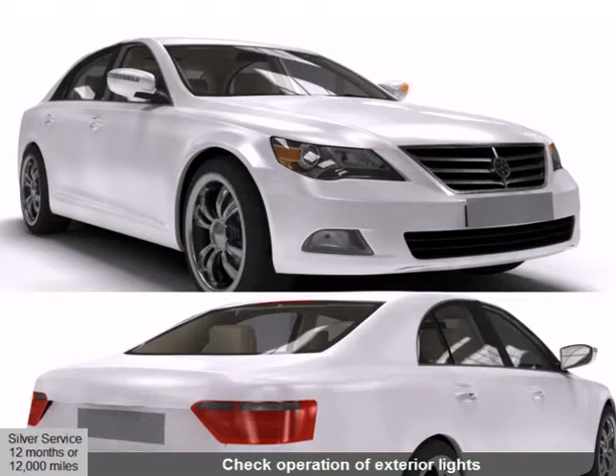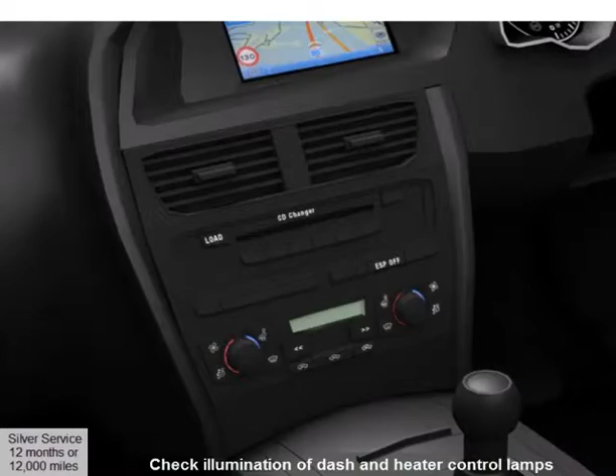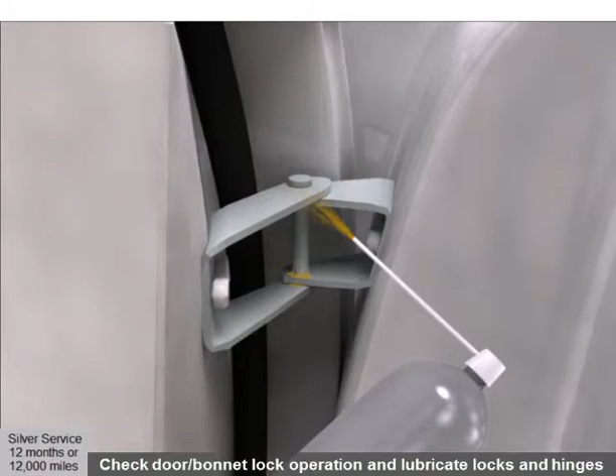Exterior lights, reflectors, warning lamps, dash and heater control lights are all checked for correct operation. The battery condition and connections are checked to ensure consistent starting. The door and bonnet latches are checked, and locks and hinges are lubricated. Windscreen wipers are checked to make sure the screen is kept streak-free and the screen wash is refilled.

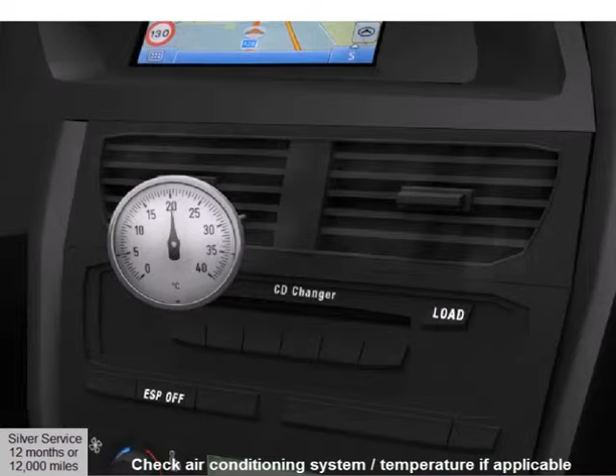Where the vehicle is fitted with a pollen filter, the filter is inspected to ensure clear airflow, and the aircon is checked for cooling efficiency.

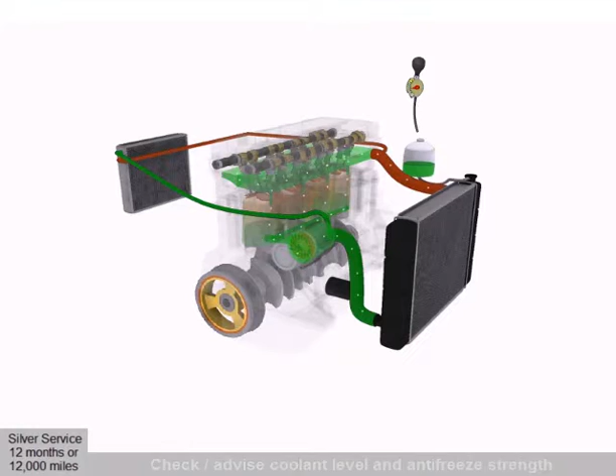The engine oil is drained and refilled with new oil according to manufacturer specifications. The oil filter is replaced, and the engine is visually inspected for oil leaks. The engine air filter is replaced. The engine coolant level is checked, and the condition and strength of the antifreeze is measured. The coolant is topped off if required, and the cooling system is visually inspected for leaks.

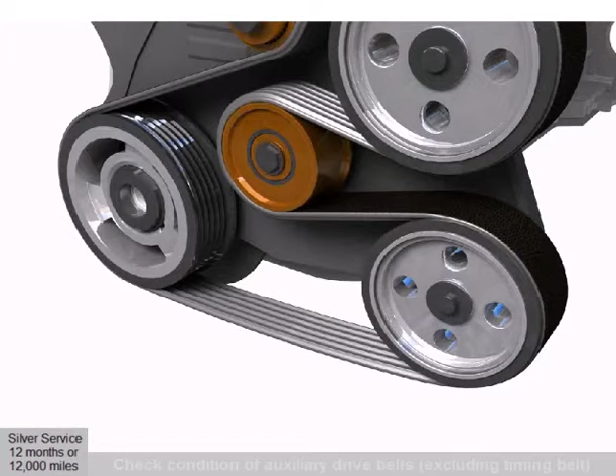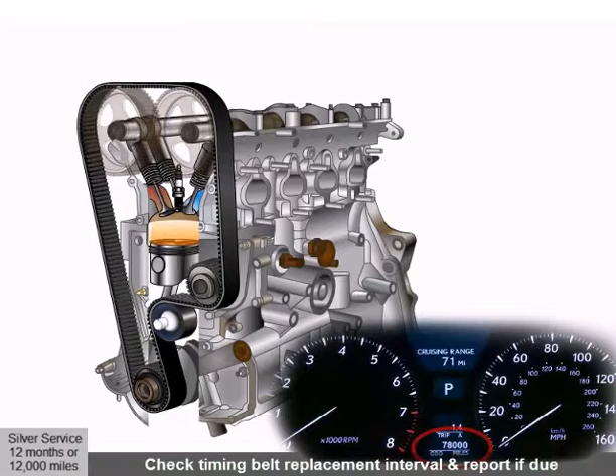The condition and tension of accessory drive belts, such as the alternator belt, is checked, and the fuel system, including the tank and fuel cap, are inspected. On engines with a timing belt, the manufacturer's replacement interval is checked, and replacement is recommended if required.

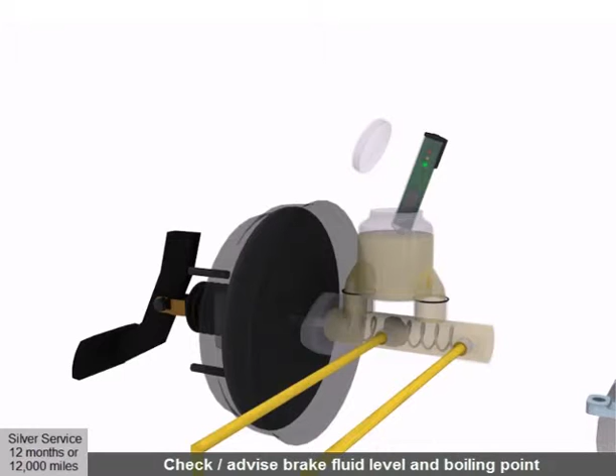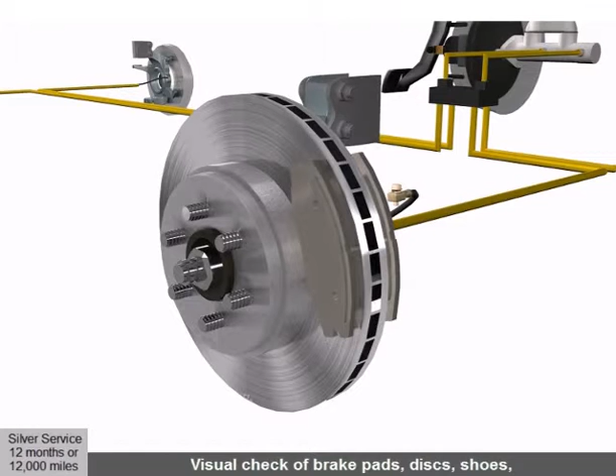Next, we move on to the brake system. The operation of the brake servo is checked, along with the condition and boiling point of the brake fluid. The fluid level is topped off if required. Brake calipers, pads, discs, wheel cylinders, shoes and drums are inspected for wear or damage, and brake hoses and lines are checked for corrosion or wear.

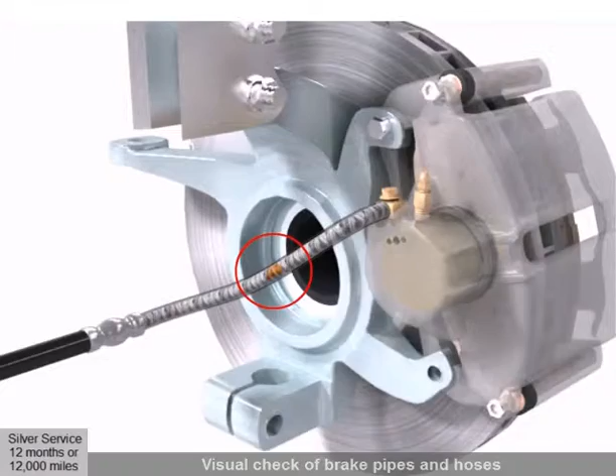The operation of the handbrake and linkages are checked and adjusted where necessary.

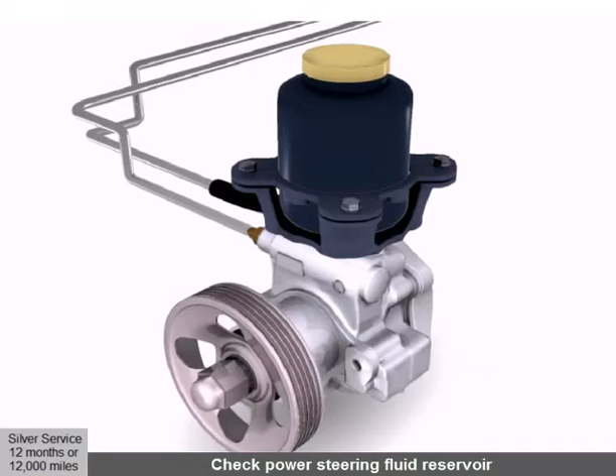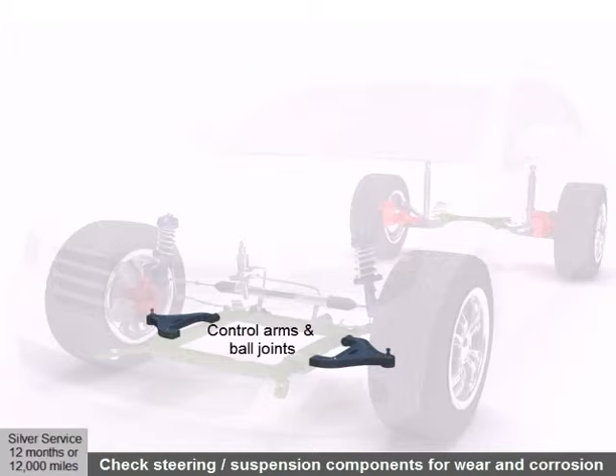Areas checked in the steering and suspension system include the road springs, the condition and level of the power steering fluid, and all major steering and suspension components, including suspension struts and shock absorbers, control arms and ball joints, the steering rack, track rods and linkages, anti-roll bars and anti-roll bar links.

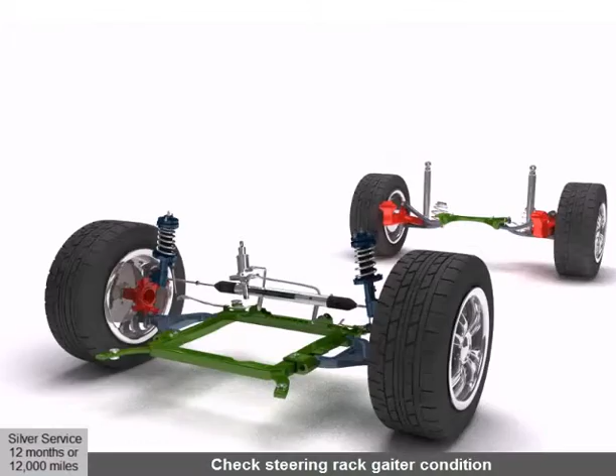The gaiters on the steering rack are inspected for tears or cracking, and the shock absorbers are inspected for leaks or damaged mountings. Wheel bearings are inspected for looseness or excessive free play and road noise.

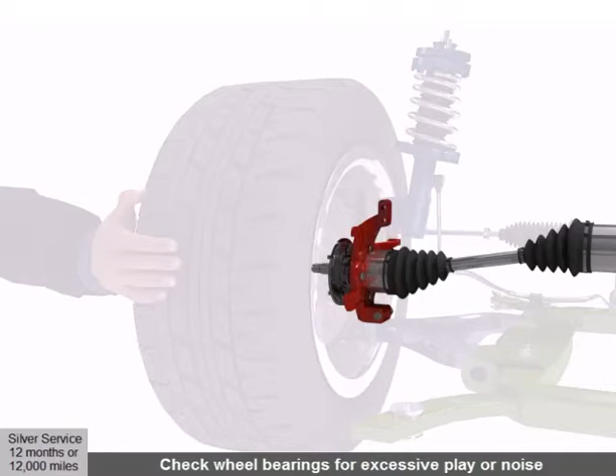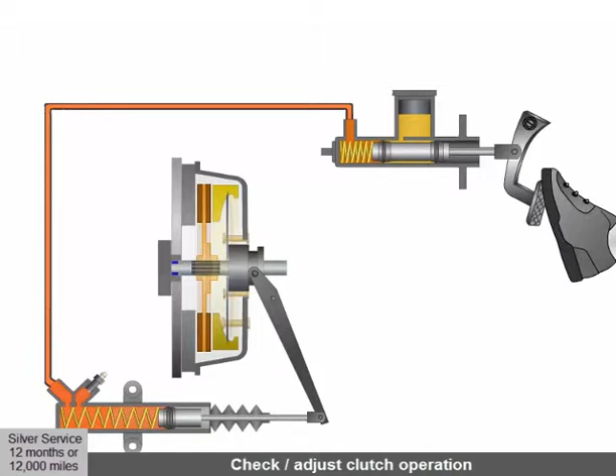The rubber gaiters on the driveshaft joints are checked for cracks or tears that could allow their lubricating grease to escape. The fluid level inside the gearbox and differentials is checked, along with the operation of the clutch on manual vehicles. The transmission or gearbox is also checked for fluid leaks.

The exhaust is checked for leaks and to ensure that mountings are secure. The condition and tread depth of all tires is measured, and tire pressures are checked and adjusted as required. Wheel nut torque is adjusted where necessary to match manufacturer's specification.

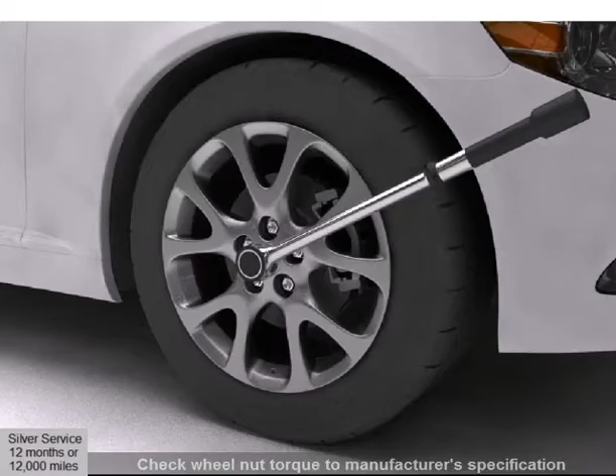A scan of the engine management system is performed, the service reminder light is reset where fitted, and the service book is stamped.